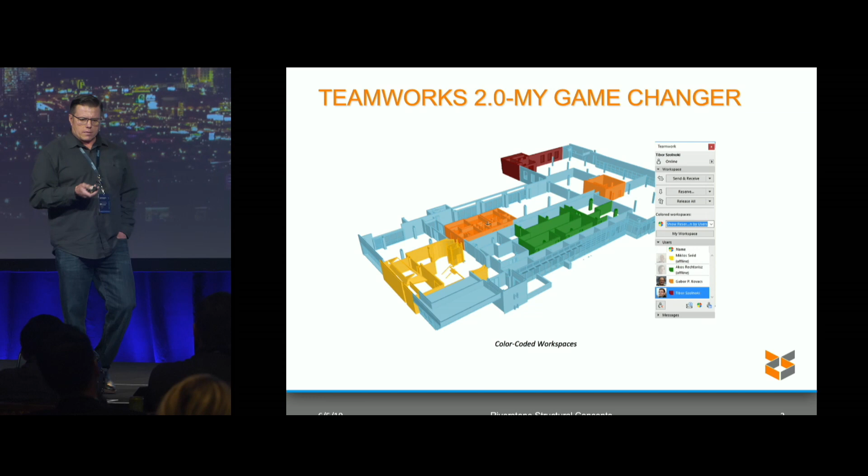And I said, that's a great idea. So we did that. So we were working on our models together with everybody in our office. And so we started going down that process and saw the value in it. Then I got the call. So we have a client in Sun Valley, and they had a project that they needed to get submitted in 2 weeks, or the code was going to change.

Excuse me, that late night at that bar is kind of catching up with me here. Need a quick drink. Jake, you're in trouble, by the way.

So they needed to get a project done in a 2 weeks time period. And they said, hey, is there any way you can help us out? And I said, challenge accepted, because I knew that by working in the model in the BIM server in our office, we were going to be able to expedite the whole process.

So the way we did it was we took everybody in our office on this one project. So I had one person working on roof framing. I had one person working on floor framing and foundations. We had another person doing lateral analysis and shear walls. And we got it done in a 2 weeks time period. It was a 9,000 square foot house.

Now, my clients that are out there are now saying, why don't you do our projects in a 2 weeks time period? There's a reason for that. There's a little bit of background. This particular client we'd already worked with before, so we had some details that we were able to pull over. But there were a lot of late nights. There was a lot of Red Bull, lack of sleep. So that's how we were able to do it.

But the proof was in the pudding. And the fact that we were able to make this happen convinced me that that is the workflow that we needed to do with our clients. So we used that as a catapult to convince them to go down this path. Now, as you can see from this project here, this is the project in question. It's in beautiful Sun Valley, stunning.

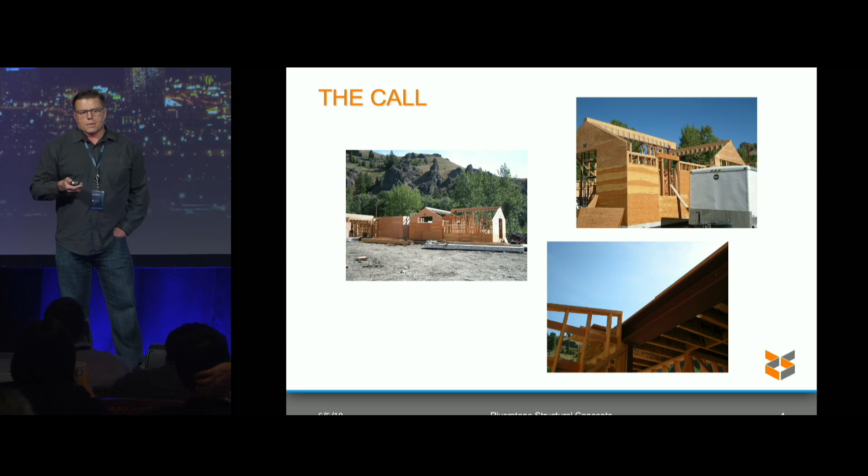One of the challenges that we had, it's not shown up real well here, but this particular client requires L over 1,000 for their live load deflection criteria. So that's a 200+ pound beam in the floor. So it wasn't an easy project, but the fact that we had everybody focused on just one project for 2 weeks straight allowed us to really expedite the process.

So as a result, we were able to use that to convince our clients to trust us enough to get into the model. And the way we started is we set up our own BIM server and set everything up so that they didn't have to go through the process. And once they got familiar and comfortable with it, they set up their own BIM servers. And it allowed us to branch out and work outside of our areas.

So, right now, as she mentioned, we're on 27 different BIM servers, which in the beginning was a bit challenging because we have version 15 all the way to 22. Yes, I said version 15. I actually have some clients that are working on 15. It's very painful. But when you're working on so many different versions, the updating had to be very coordinated.

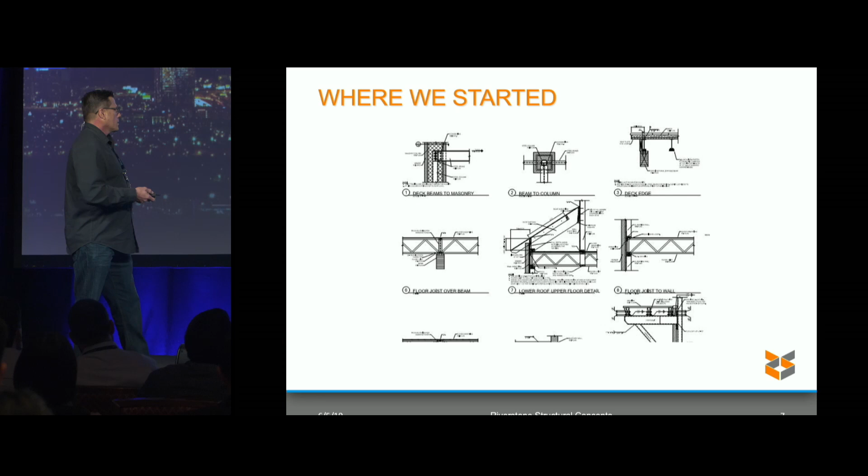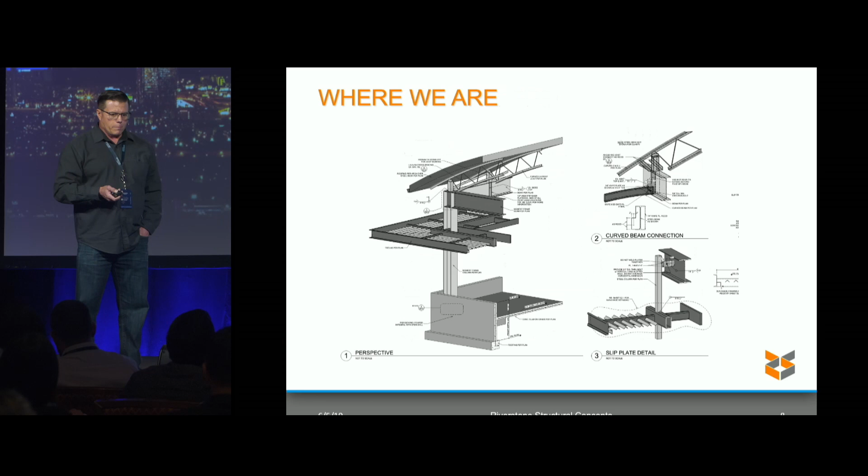So, conventional structural drawings, 2D documents, give you all the information that you need. It tells you what the sizes are. It tells you how to connect it and things like that. And it's important and it's useful. But what we're trying to do is expand more into 3D isometric drawings and detailing.

And it kind of depends on the project. It depends on the budget. It depends on the client and what level they model to. But this one detail here cuts out two-dimensional details and gives all the information in one shot.

So the contractors really like seeing this because it gives them all the information they need and they don't have to flip through a bunch of different pages. So we have a combination of this and 2D right now.

We found a few years ago that it costs more to model everything in the building. So we had to offer a 2D kind of option where we're still in the model, we're still collaborating with everything to scale, but we're able, for budget conscious projects, to deliver something a little faster. It still has some of the 3D elements, but we can do it at a little lower price. So we kind of have a combination of the two right now.

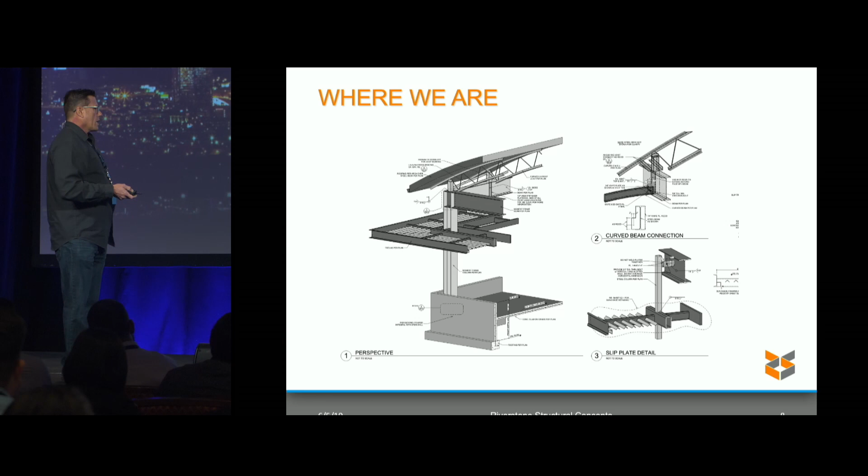Where we want to go is everything modeled 3D, details 3D. That's a process, and again, it takes effort on the client's side to make sure that it's modeled correctly and in the right spot. But we really want to go down this path, and we think it's possible, especially with some of the new functions that we saw this week coming out down the road.

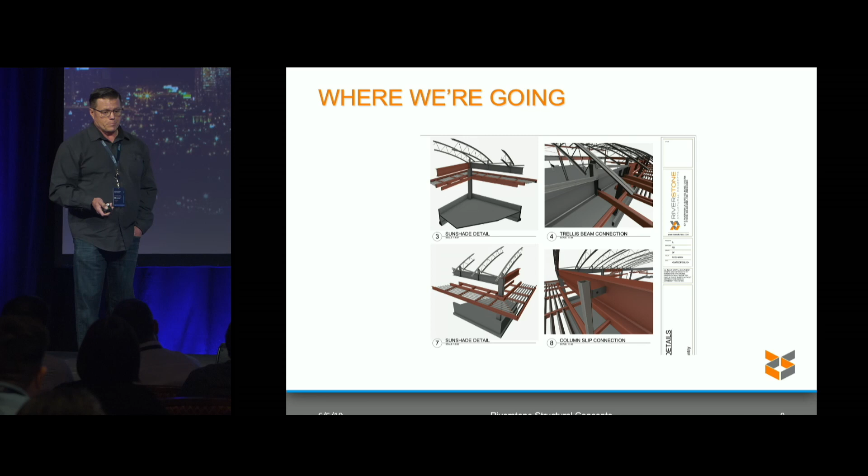So about 2 years ago, Victor and his team came all the way to Boise, Idaho, and they were picking our brains on what you guys saw earlier this morning regarding the analytical model and how it fits in the architectural model and the project model. So they came out for 2 days and asked us about how our workflow was and what value we saw in the analytical model, and obviously we gave them the great feedback that we could on our side.

But more importantly, I'm proud to say that he had the best steak of his life in Boise, Idaho. It's a hot rock fillet. It comes out on a rock, and you cut off your pieces, and you actually cook it on the rock. And we had 8 of them at this one table, so the temperature rose probably 30 degrees that day. He states today that that's the best steak he's ever had. So I'll hang my hat on that. It was good to talk to him about it.

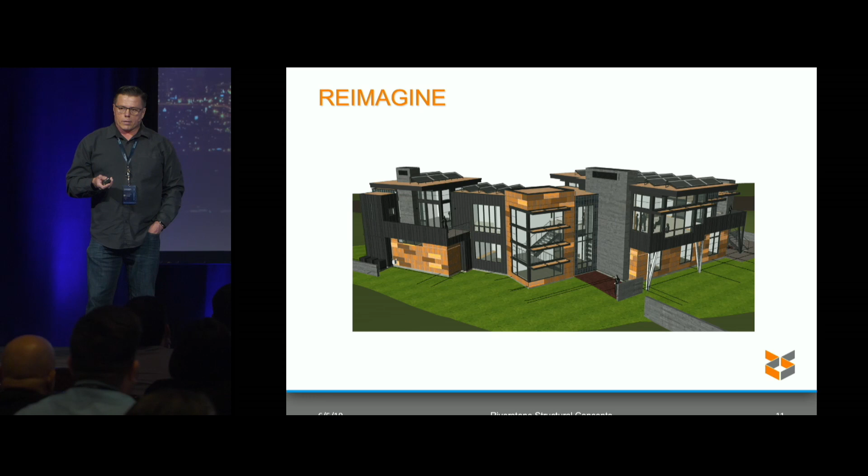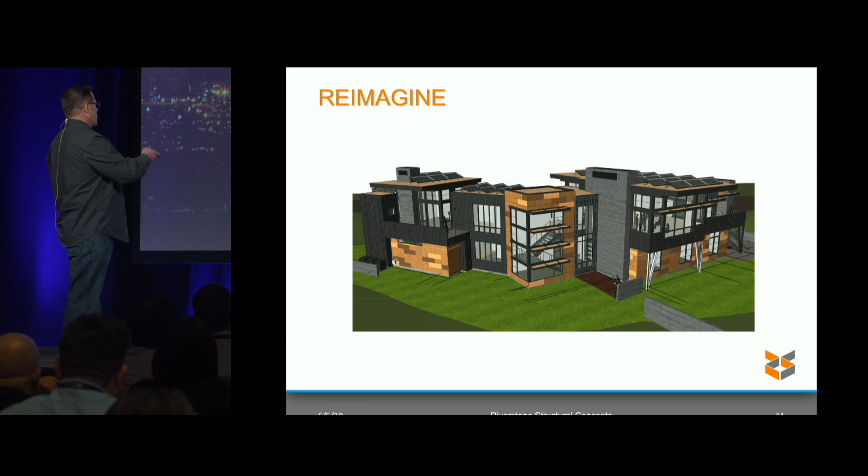So now what do we do? So reimagine the technology you saw this morning with the analytical model combined with the architectural model. As you can see, we got some complex areas, some complex posts here, and we need shear walls everywhere, especially in high seismic or high snow load country. So by being able to take that technology and, instead of modeling it twice, have our analytical model in this model, it just saved us the time, as they mentioned earlier.

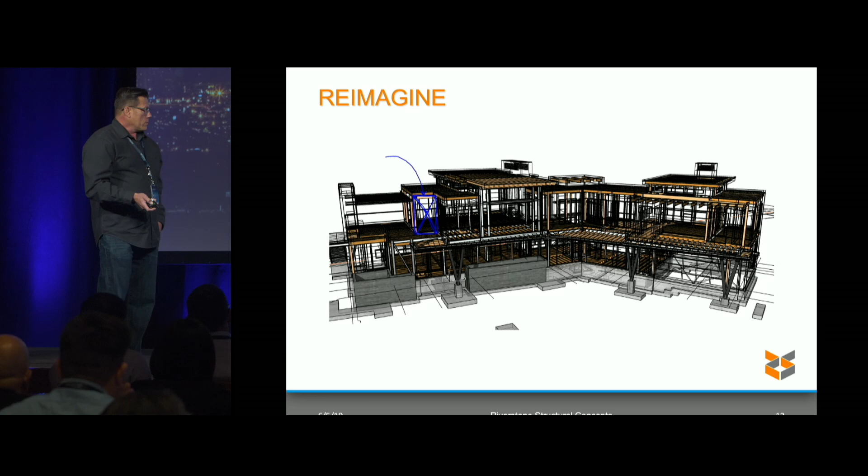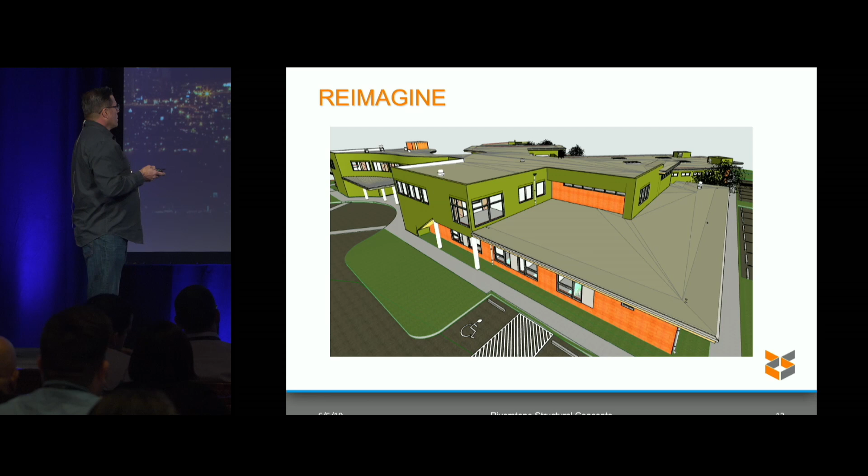A lot of times we have to go completely remodel everything for our structural model because the nodes aren't aligning, and it takes longer to fix all the links than it does to just start from scratch sometimes. So now what we can do is start here. So here's a project that we're doing in Redding, California. It's a medical services building, with a lot of curved walls, a lot of transitions, a lot of roof changes, and there's a lot of steel, tons of steel here.

So now imagine if we had that technology before we started this project: when we put that beam in, I wouldn't have to reanalyze or remodel this structure. And it's going to save us time. It's going to put out a better product, and it's going to increase that workflow and smooth transition to get from the very start of the design to a point where we've got it not only analyzed, but hopefully send that information downstream to the contractors and try to put out a better product.

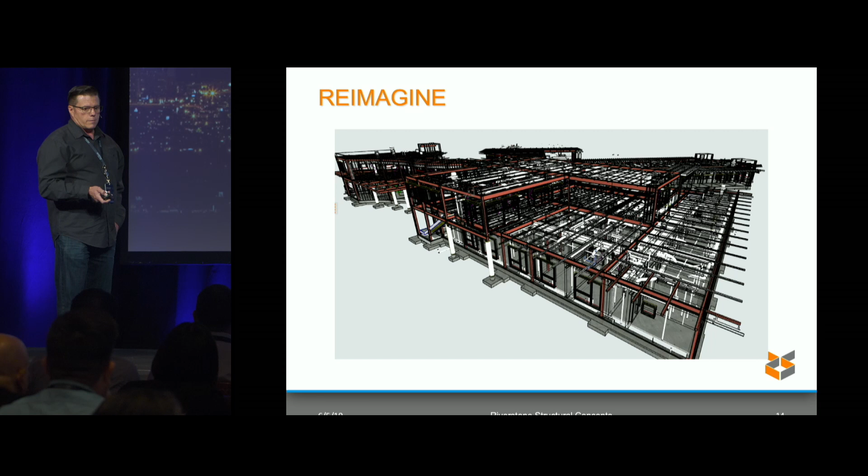And this is some of the inside portions, but you can see there's a lot going on. Nothing's straight. I mean, this is at an angle. This is at an angle. If we had that technology right before we started this project, it went really well, but it would have gone even faster.

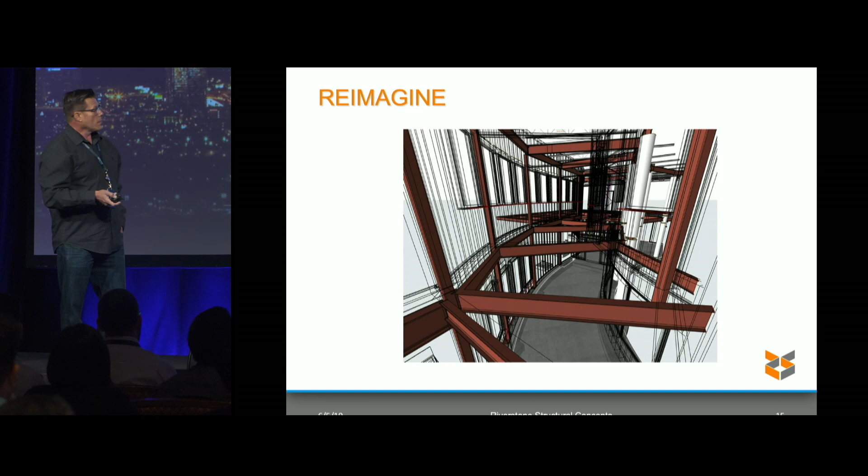So here's a project that we did in Las Vegas, the Porsche dealership. We did it as a collaborative effort. And what I want you to take away is reimagine that, with the technology that GRAPHISOFT's coming out with, allowing us to have the analytical model as part of the architectural model, and increasing the ability to go from the beginning to the end, we're going to have a better product.

So if you have a consultant that is still in 2D, or if you have a consultant that is in Revit or not wanting to look at ARCHICAD at all, just have a conversation with them and tell them that the possibility of working with you seamlessly is going to increase their bottom line. It's going to give them the opportunity to work outside of their normal area, new projects, new clients, and I feel that it's going to put out just a better product overall.